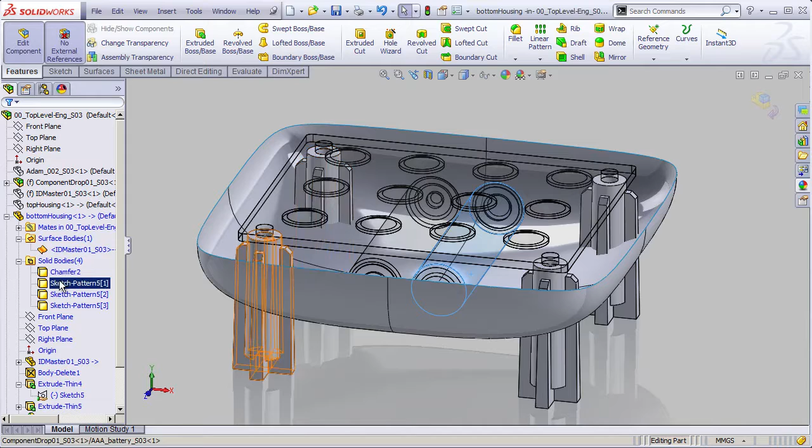So let's hide these screw bosses that we just created, just so those are visually out of the way. And I'm actually going to hide the housing surface as well, so we're just left with these interior components.

Go to my front plane, and that is, once again, the front plane of this bottom housing, not the front plane of the assembly or anything like that.

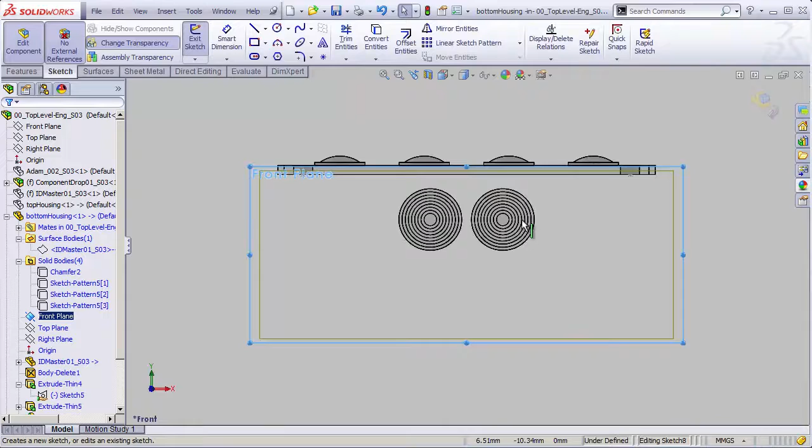Create a sketch right there on the front plane, and I'm going to grab a rectangle, shoot a rectangle right around these guys, and grab a center line, and put that center line at the midpoints, right down the middle, so this is centered, just like that.

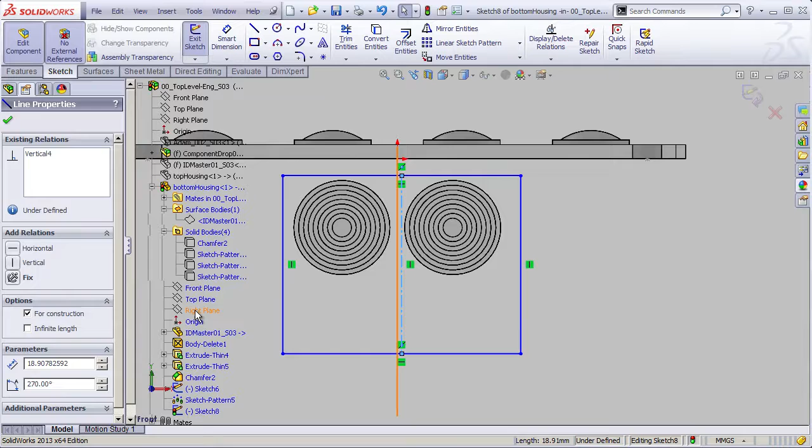I'm going to grab the right plane of our part and control-click this center line to make those collinear. That way these things will be symmetrical.

So I can drag this in and out and both sides move. I'm going to move this so that the edges almost touch the batteries.

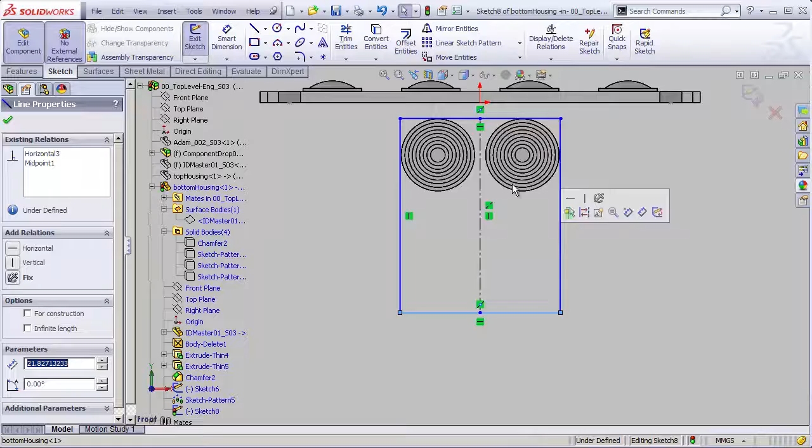Now, if you'll recall, those batteries are pretty arbitrarily placed. We could move them, but for now, I'm just going to assume they're in a good position and leave them there, just to keep things clean and simple.

Now let's just exit this sketch, and I'm going to extrude this feature as an extruded boss.

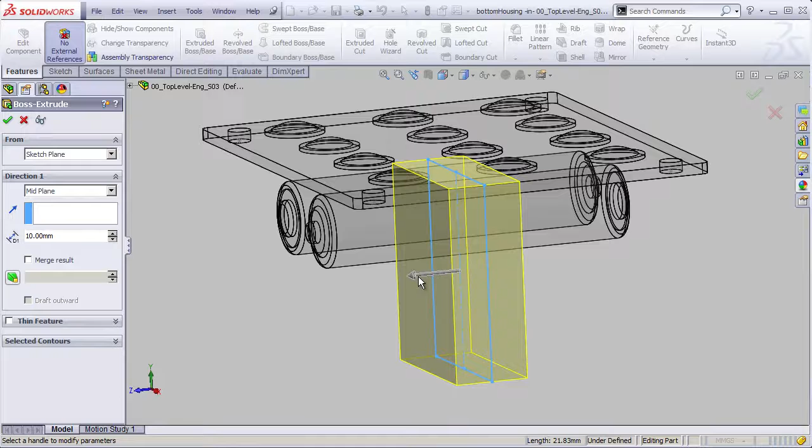In direction 1, let's do mid-plane, so it goes both directions. And then I'm just going to drag this out so that it's a little bit longer than our batteries, something like that. We would probably dimension the heck out of this if we were doing it for real, but we don't need to.

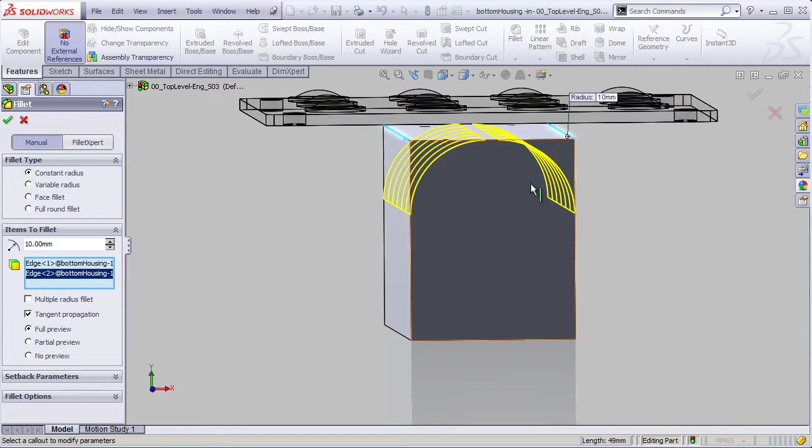Exit that. Now I'm going to first fillet the top of this by the diameter of our batteries. But I don't know how big that is, right? I don't know what size this needs to be.

So let's hide this body for a second and just measure our batteries. And we do that with the measure tool.

So you go up to Tools, Measure, and then I'll just click on one of these edges. That's going to give me a diameter. You can see my diameter is 10 millimeters, and that is exactly how big I want this thing to be.

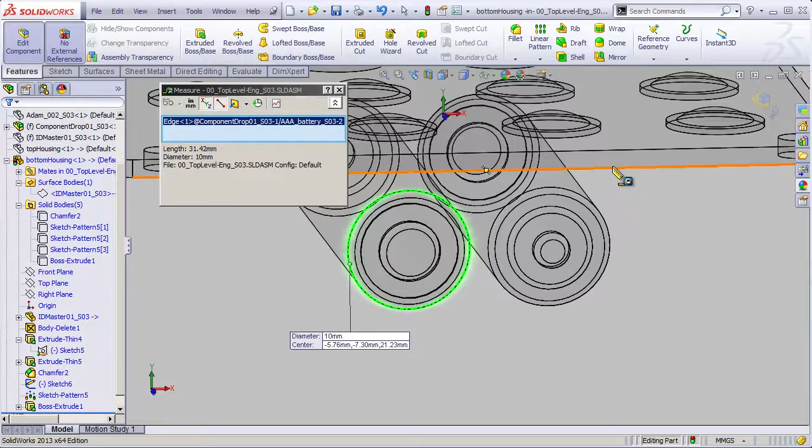So let's go back out to our boss extrude and show that. We'll grab our fillet tool, and I'll put a 10 millimeter fillet on both sides of this, and the 10 millimeters is actually a radius in this case, so let's set that to 5. Hit OK, and I'm pretty sure that's going to fit.

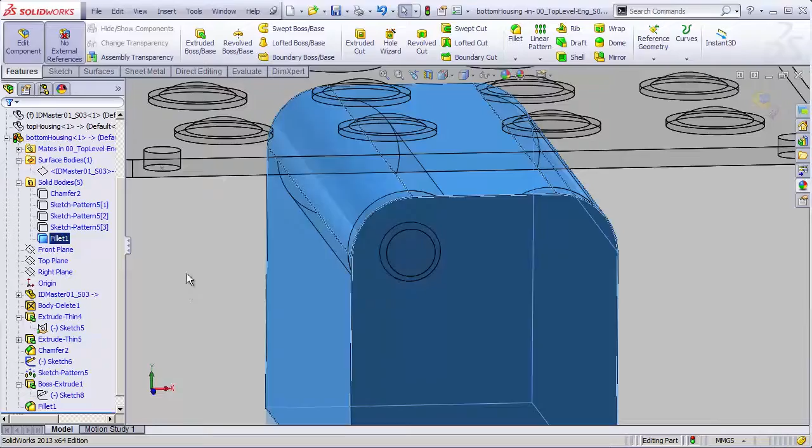Let's right-click on this guy and go down to Change Transparency, and we should see through there. Yeah, that fits pretty well.

Excellent. Next, let's round off the front and back edges. I'll grab my fillet tool and round this front edge and this back edge, let's say by 1 millimeter, so it's just got a little bit of a round there.

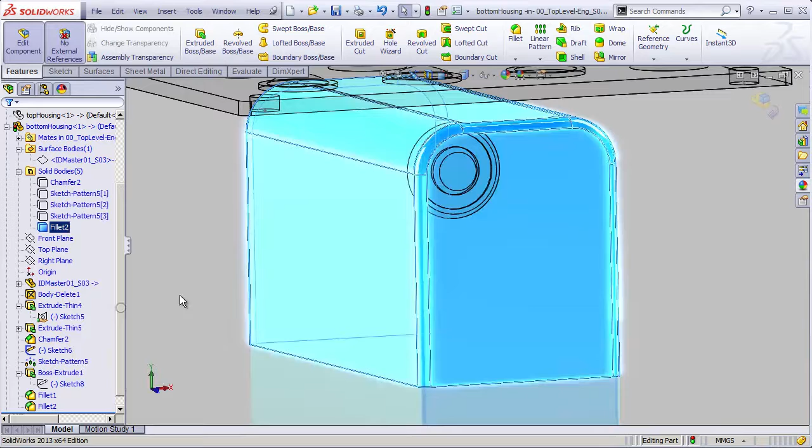And let's go back here. First, let's right-click this guy and change its transparency back to opaque. Also, in my tree, let's hide that component for a second, those components, so we're just looking at our object here.

And really what I want is the opposite of what I have here, so I'm about to do some ninjutsu that's a little bit weird. Bear with me for a second.

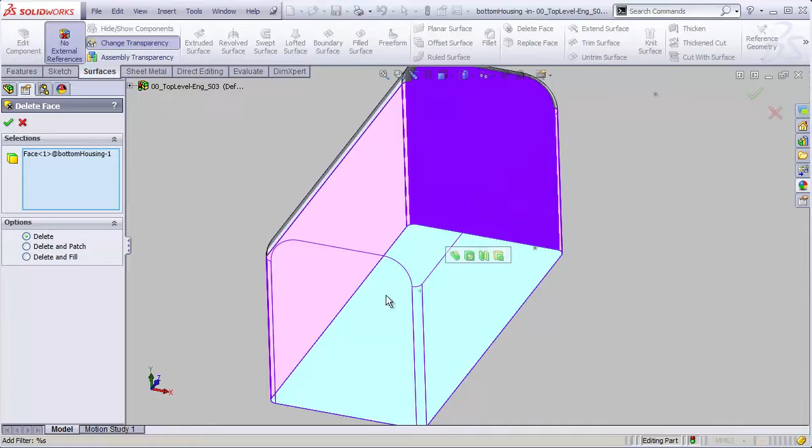I'm going to go to my Surfaces tab and say Delete Face. That'll let me delete this bottom face, and I'm just going to say under Options, Delete — not Delete and Patch, not Delete and Fill, but Delete.

Hit OK. And now we're left with just a surface, and that surface represents what's going to hold our batteries.

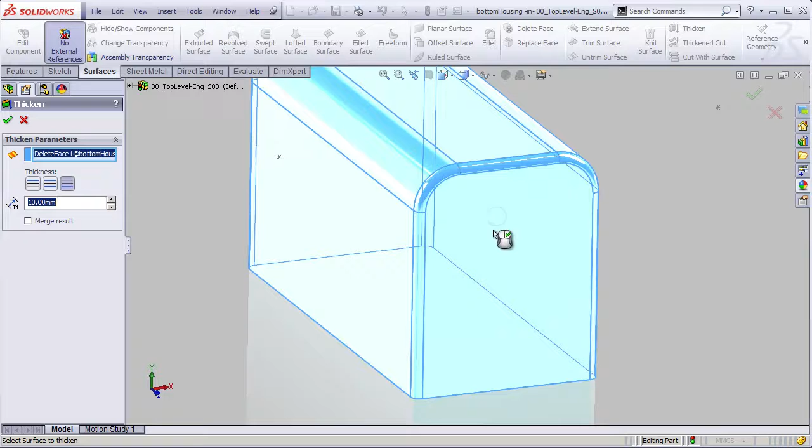And then I can thicken that using the Surfaces tools, Thicken. I'll thicken this surface outward by 1.5 millimeters and hit OK. Now I have a solid block here that represents what's going to hold our batteries.

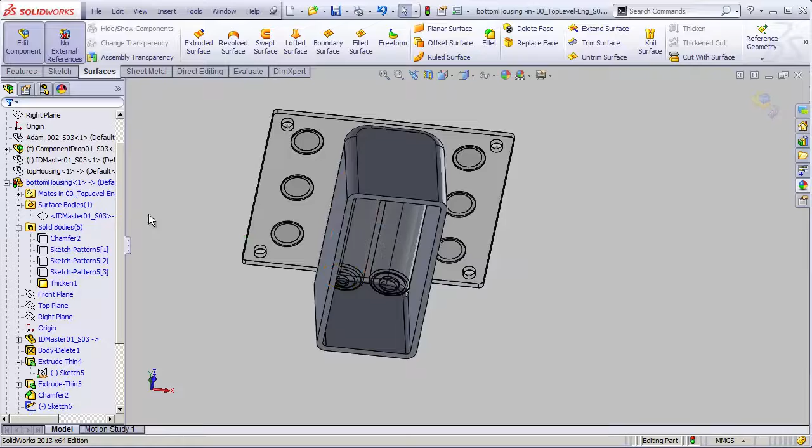I'll show my components for a second here. So our batteries are now contained inside of this solid block, and also we have all these handy-dandy screw bosses ready to use. So we're making some progress here.

Let's show this housing surface. And this is starting to look like a housing.